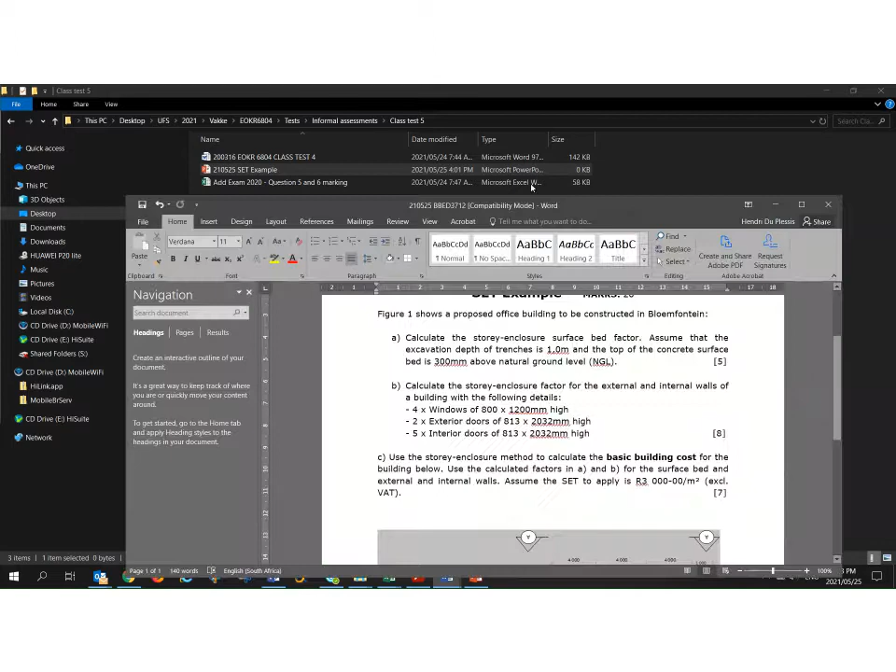Hi everyone. This is a recording just to show you an example of the storey-enclosure method and how it might be asked, or the things that you need to consider whenever applying the storey-enclosure method.

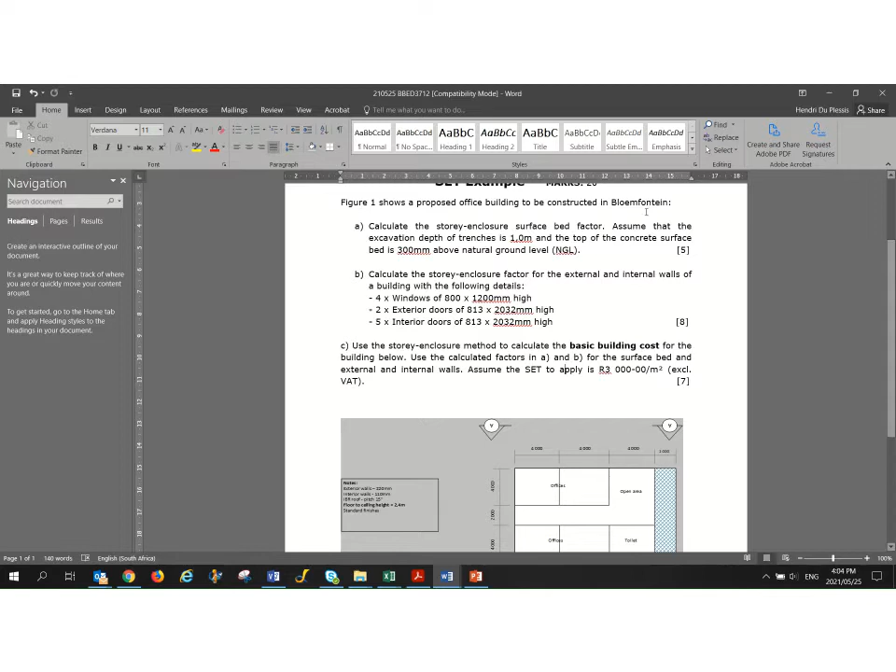So I've got a nice question here that I set up this afternoon. What you can see here is the example. I see there's a mistake here, I'll just correct that. So you've got a typical question with a drawing that is given, and then you have some different criteria surrounding it, and so on.

The question reads: Figure 1 shows a proposed office building to be constructed in Bloemfontein. The first question is calculate the storey-enclosure surface bed factor, and assume that the excavation depth is 1 meter and that the top of the concrete surface bed is 300 millimeters above the natural ground level.

If you look at example 5 of your study notes, you will see that it's similar to this, and it's a combination of all the preceding examples before this one.

That's question A. Question B is calculate the storey-enclosure factor for the external and internal walls of the building with the following details, and then you are given certain parameters.

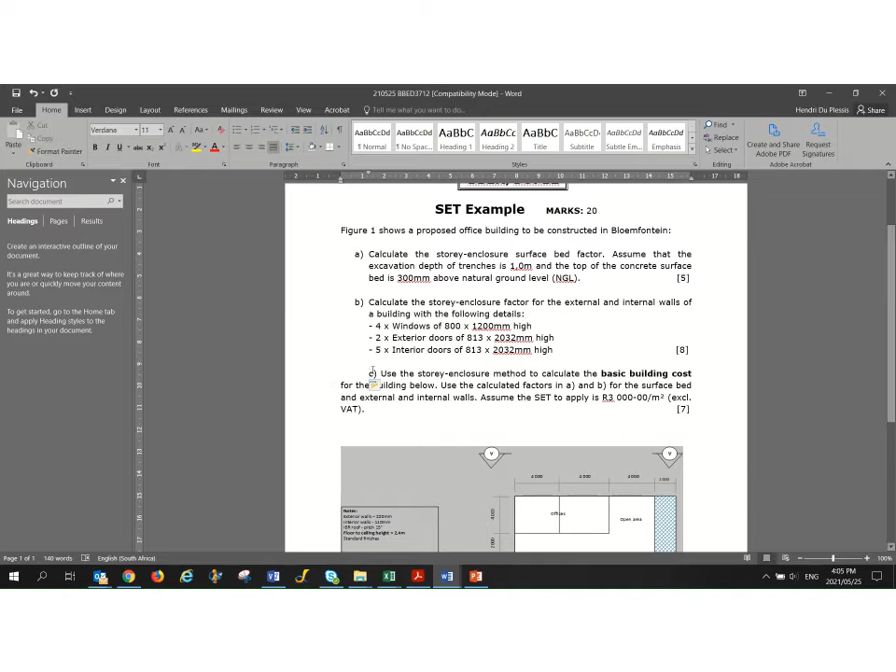So you can see there's 4 windows of 800 by 1200 millimeters high. You've got 2 exterior doors, and you've got 5 interior doors for this specific drawing. So that is question 2, or B.

Question C is use the storey-enclosure method to calculate the basic building cost for the building below. So use the calculated factors in A and B for the surface bed and external and internal walls, and assume the storey-enclosure tariff that should be applied to this question is 3,000 Rand per square meter.

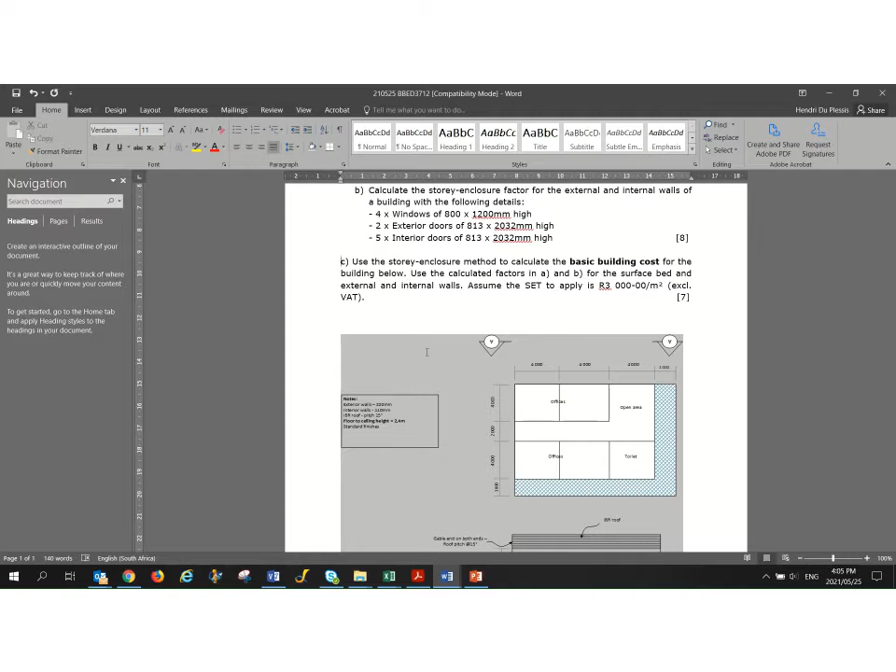So those are the parameters given and the example given. Looking at the drawing, the available information we've got is certain dimensions given: the exterior walls is 220 millimeters and the interior is 110 millimeters.

We've got an IBR roof with a pitch of 15 degrees, so that's very important to take note of. We've got floor to ceiling height of 2.4 meters, and then we've got standard finishes.

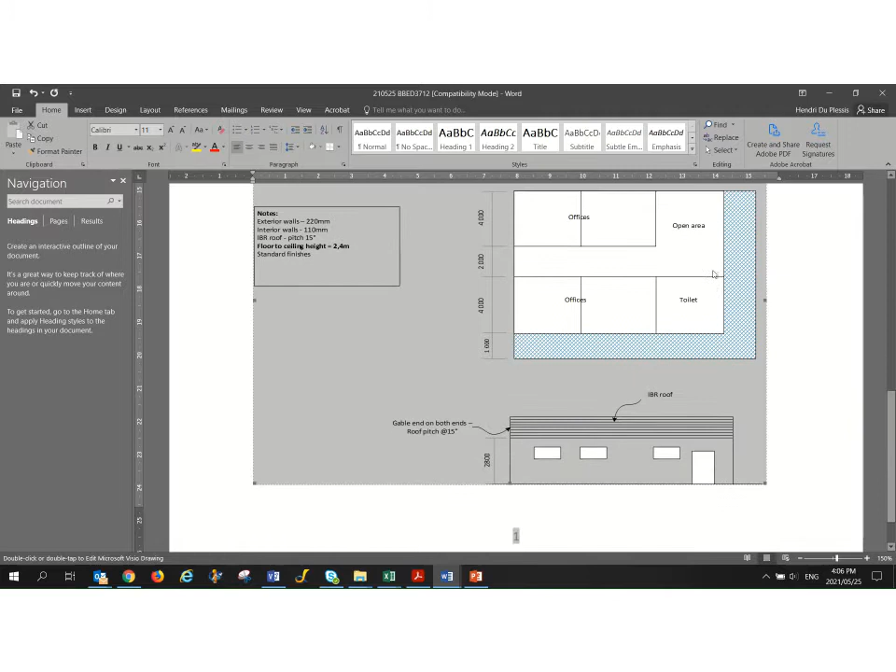And then we've got the external perimeter, and we can see the blue hatching is some paving also included in this drawing. We can see that the height from the top of your surface bed up to your roof plate is 2.8 meters.

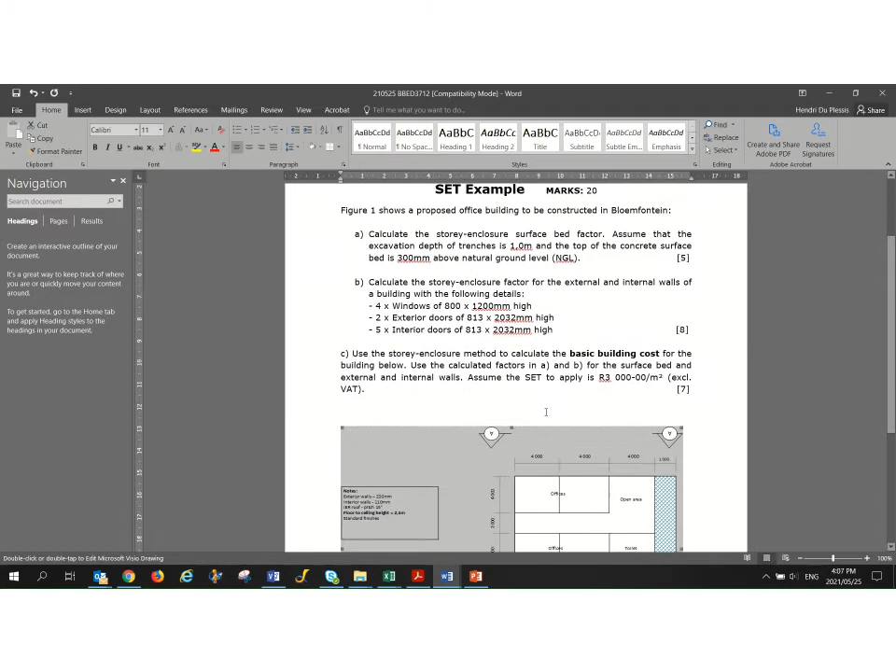So yeah, that's the basic information given. Let's have a look at question A and how to approach these questions. I've just copied this example into an Excel spreadsheet to make it available also.

So the first question is calculate the storey-enclosure surface bed factor, and assume that the excavation depth is 1 meter and the top of the concrete surface bed is 300 millimeters above the natural ground level.

Now, if you need to calculate your factor for your surface bed, the following formula has to apply. So we know this is the formula that we have to use, so this is one of the formulas that you have to know.

You need to know that D is the depth for the excavation in meters, and H is the height for the filling in meters, and then L is the length of interior and exterior foundation walls combined, so please take note.

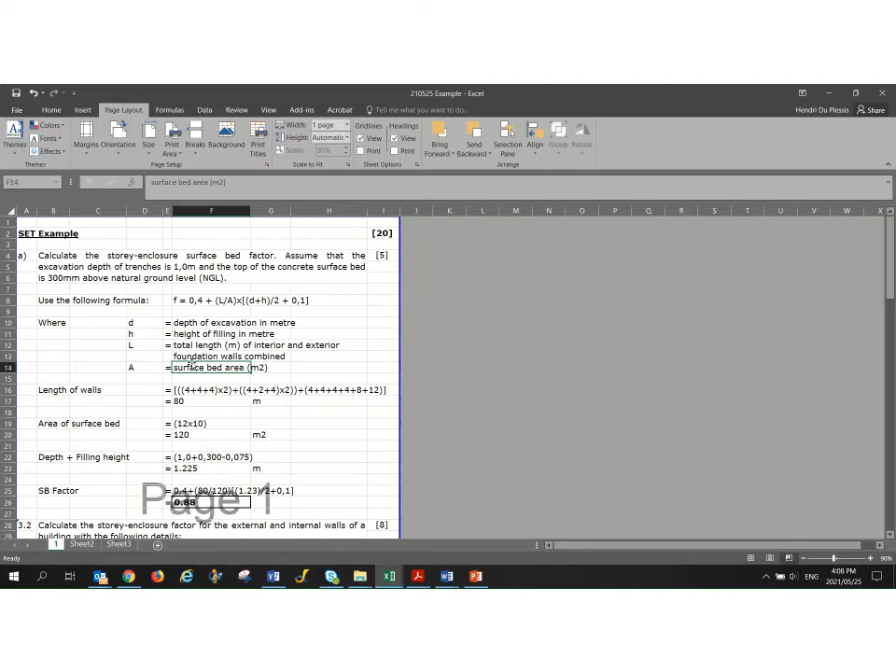And then you've got your area, which is your surface bed area that you will use. So then you basically just calculate or populate your formula.

So then you go through the basics of just measuring your work. I'm just going to put this on, and then you just calculate your perimeter walls, you measure that.

You go through your interior walls, you measure that systematically, and yeah, you just measure this systematically, and you get your length of your walls.

Sorry, I'm not going to do all of it because it's just going to be a bit time consuming if I do go through all of this, but basically you just go through the measurement of your lengths of your walls.

Later on you will use these lengths again when you're calculating your area of your external walls and the area of your internal walls. So yeah, just be aware of that.

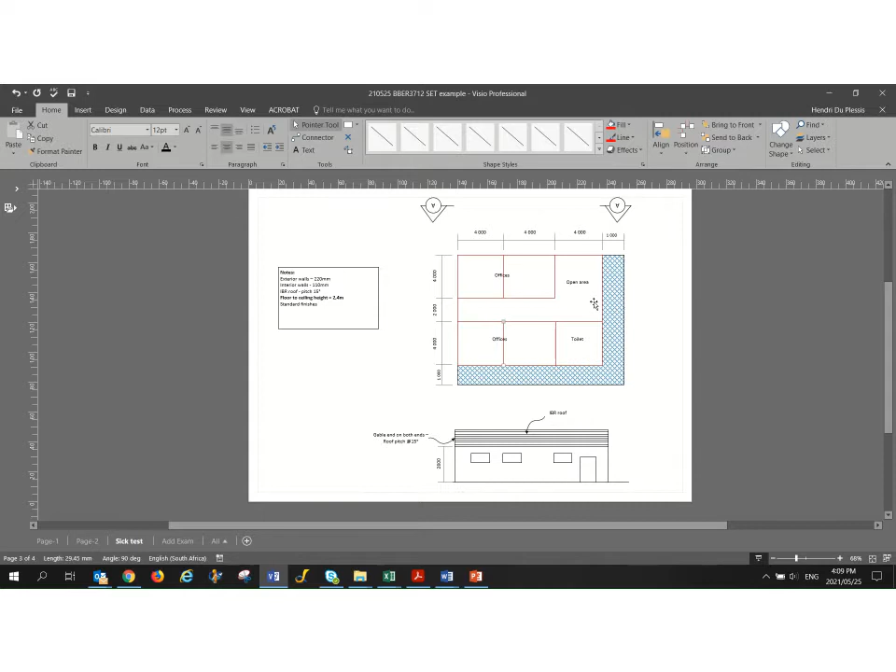So I'm just going to put this aside and then look again at our length. So the length of our wall, I calculated it as 80 meters, and then the area of our surface bed is basically 10 times 12, which gives us 120 square meters.

And then our depth of our filling and height, this is where you have your depth of your excavation plus your depth of your surface bed or your filling above your natural ground level. And then you need to remember to deduct your surface bed 0.075 as well.

So if you look at your examples, it clearly shows you how that is done. I think it's in example 4 of your study notes, so have a look at that, how this height is calculated. It's explained there in quite good detail, so just be mindful of that.

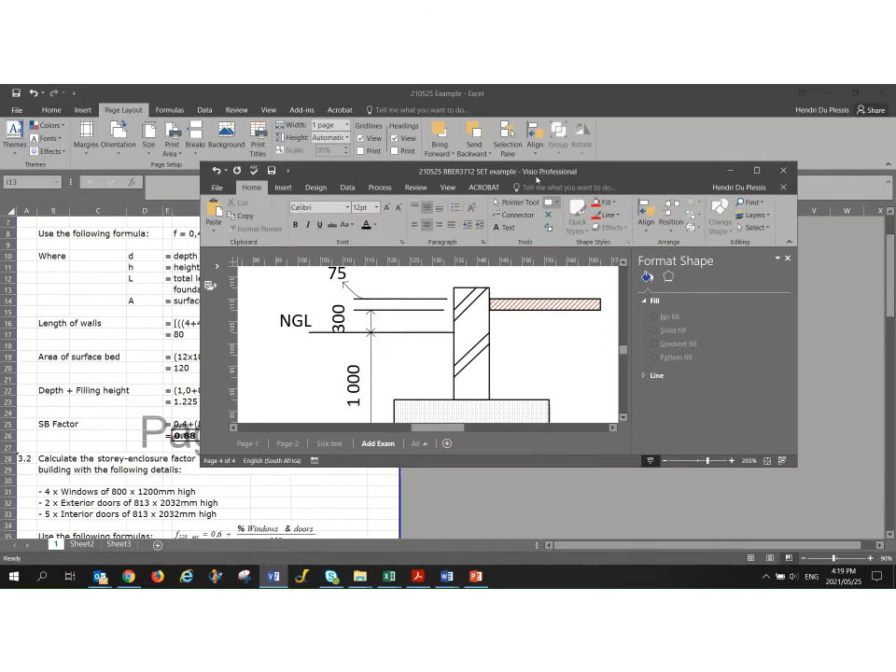Hi everyone, sorry I just took a small break there. I thought it would be best if I make a quick drawing of how that depth is calculated and how everything works into each other.

So here you can see your excavation depth is 1 meter, and then the 300 millimeters for your surface bed above natural ground. Sorry, that should actually be up to there, so it's the 300 mils up to the top of your surface bed.

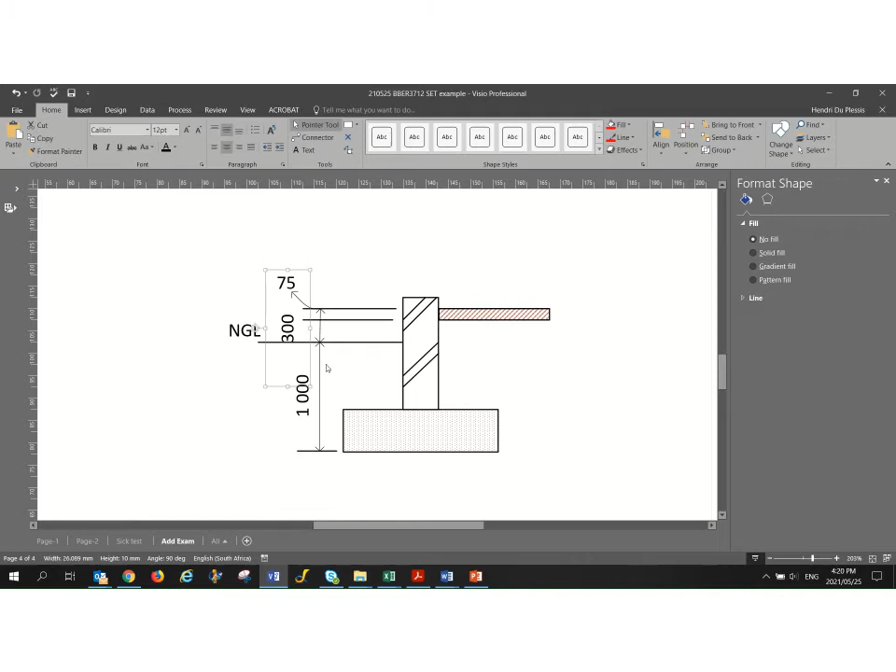So there's a little trick here. If the question states to the underside of your surface bed, then you don't have to subtract this 75 millimeters. But this is in short how that depth is basically calculated. You can familiarize yourself with the example in your study notes as well, but this is more or less how it works.

Okay, so getting back to the example, we now calculated our depth, which is our filling height. So it's 1.225, which you can round to 1.23.

Then what you do is calculate your factor by populating your formula. So it's 0.4, and then your length of walls divided by your surface bed area, times 1.23 divided by 2, plus 0.01, and then you add the 0.4 at the end. This is basically the formula, and you get a factor of 0.88. So that's the first question answered.

Have a look at that. The second question is to calculate the storey-enclosure factor for the external and internal walls of the building with the following details. So now we know it's the internal and external walls, so two formulas will apply.

So we've got our first formula, which is in your book that you have to know, and our second formula for the 110 millimeter wall. You've got your percentage of windows and doors that you have to calculate, and your borrowed lights as well.

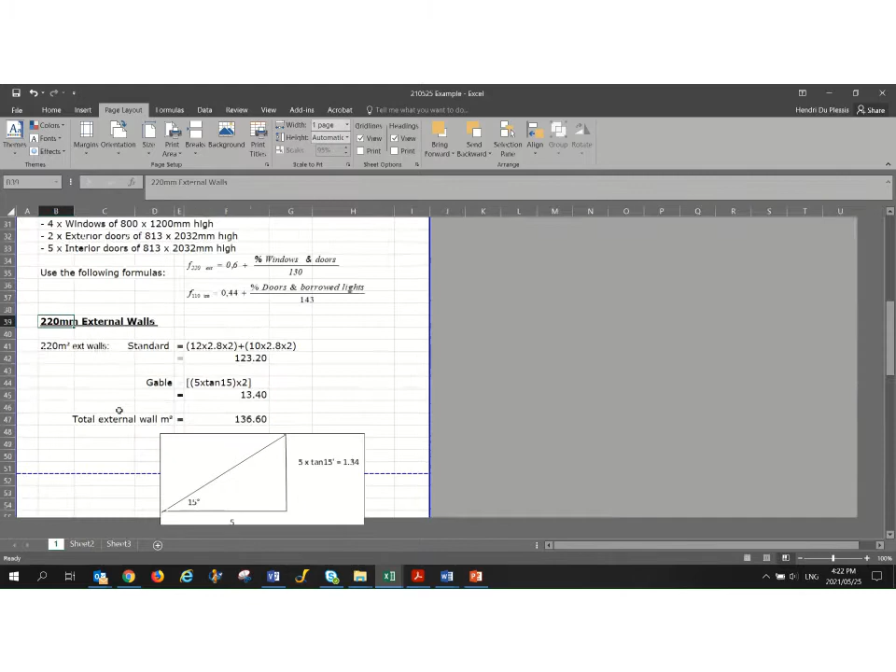Okay, so let's first look at our 220 millimeter wall. You can see here that we've put in the standard for the square meter area for our external walls. So that is now, if we go back to our drawing, let me just put this one on.

Okay, if you have a look at this, let me just convert that back to black, or let's make it purple. So it's the purple lines for this section here. You should remember it's the walls over your doors and windows, up to your wall plate level, and then you have to add your gable wall into that as well. So just take note of that whenever you're calculating.

So I've divided that into our standard one, which is our walls up to wall plate, and then I added the gable walls later on. You can combine the two, but it's usually better to calculate them separately, so that if you make a mistake on one, whoever is assessing the question can actually see what you've done.

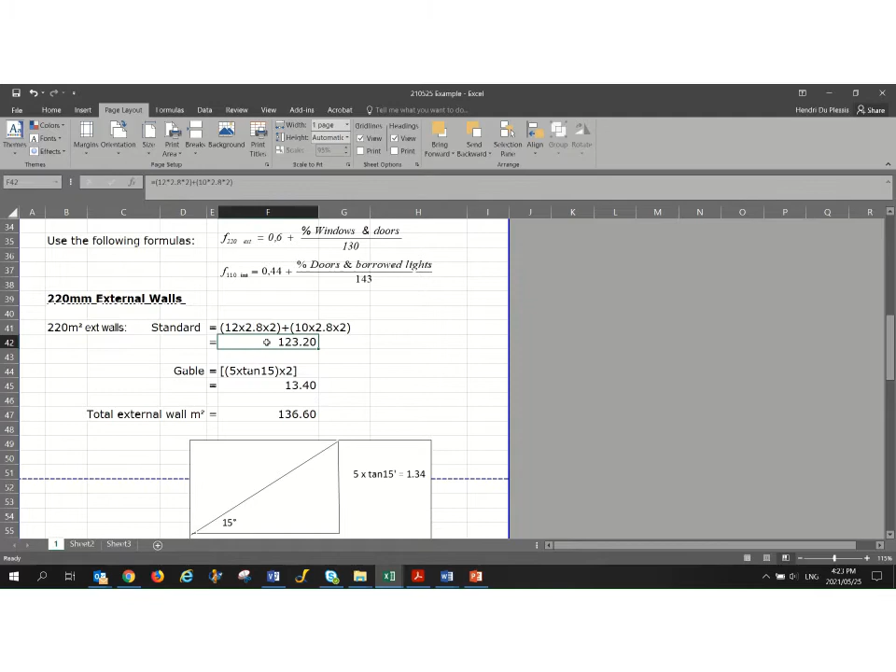Okay, I think the standard walls is quite simple. It's the perimeter times the height, which in this case is 2.8 meters. So if we go to our drawing, you will see it's the 2.8 meters here to your surface bed height. So that one should be fairly simple.

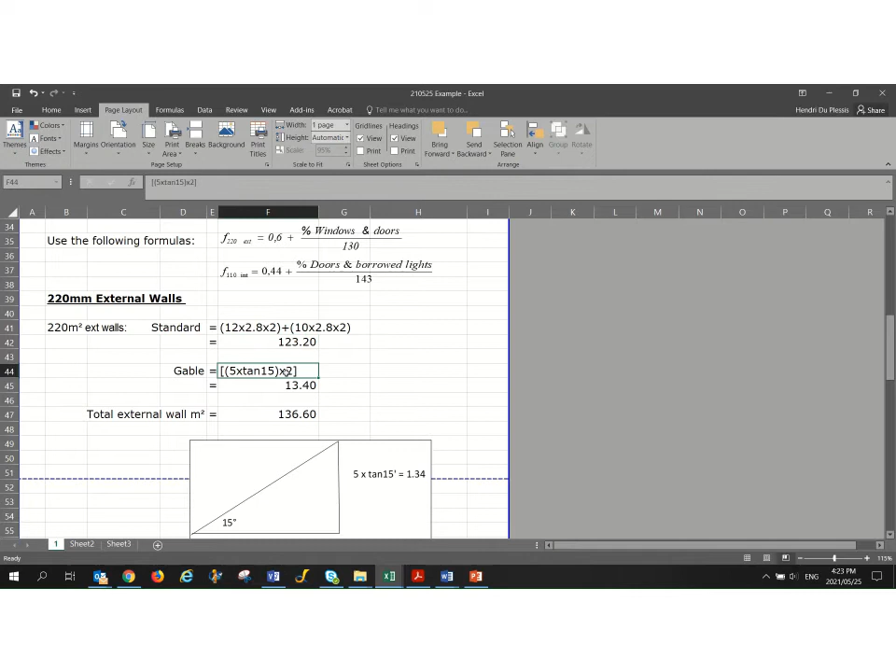And then the gable wall ends, this is where you need to use your trigonometry formulas. So what I've done is, we know that our length on this side wall where the gable wall end is, is 10 meters. We want to have a 90-degree angle that we can actually use, so we divide that section into 2 to get our 90 degrees, which is then 5 meters.

So it's the 5 meters times tan 15. Just make sure you know how to use your calculator, whether the 15 comes before the tan or behind the tan. These days most scientific calculators have the tan afterwards, so it's quite easy to use that. Then you just calculate what the height is here.

So now you've got your height and your breadth. You can calculate your area by timesing these two with each other. Also note that if you times it by 2, you will actually have the entire gable wall section on this side. So I just times that by 2.

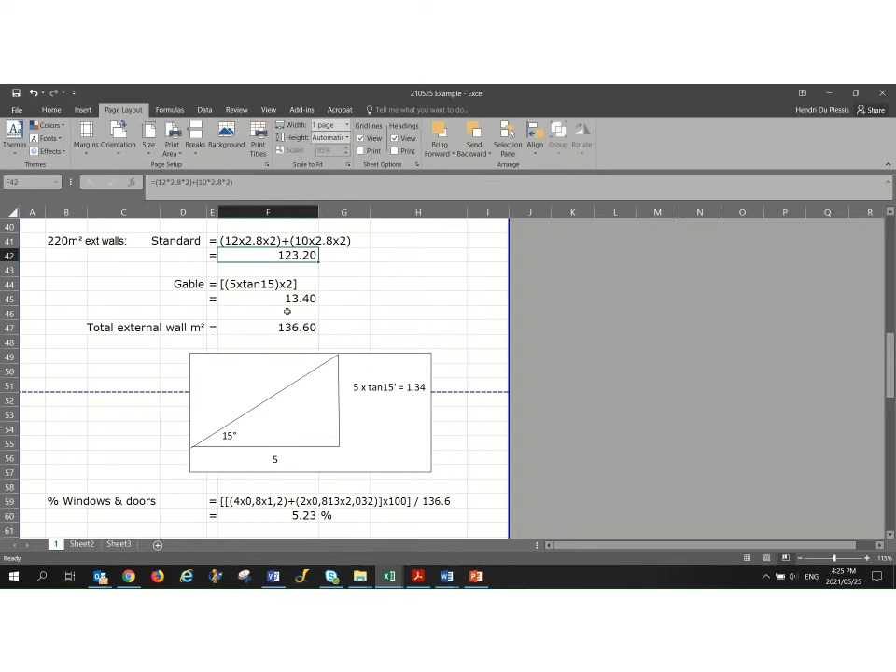So it's 5 times 1.34 times 2 to get our gable wall end areas, and we just add those two together to get our total wall area. Then you just populate your formula.

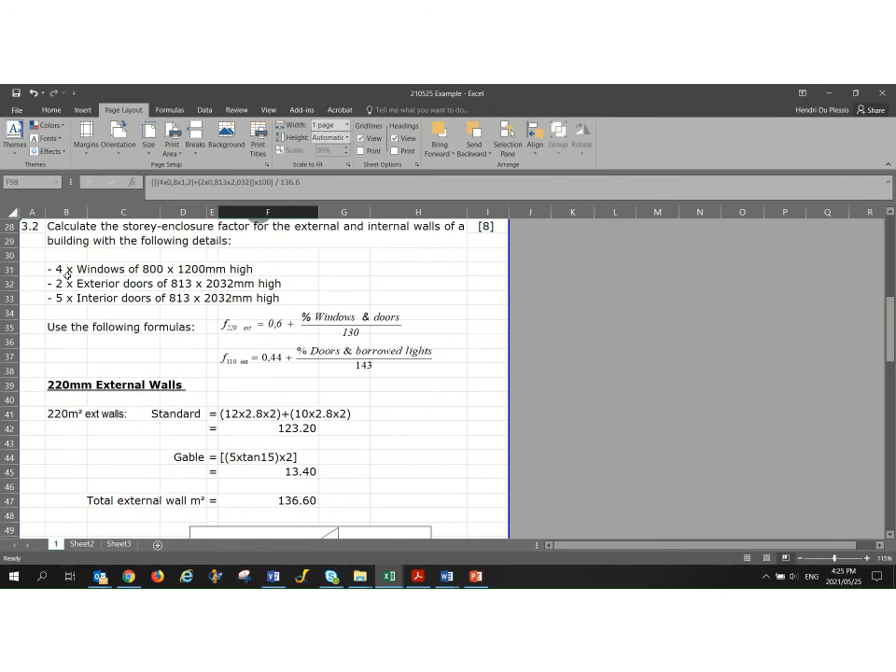In the question it was stated that we've got 4 windows and 2 exterior doors. So you get that perimeter, or the area of the windows and doors, times 100 to get it to a percentage, and then you divide it with your total wall area, which is 136.6, to get to a percentage. Okay, so that's the first step that you need to do.

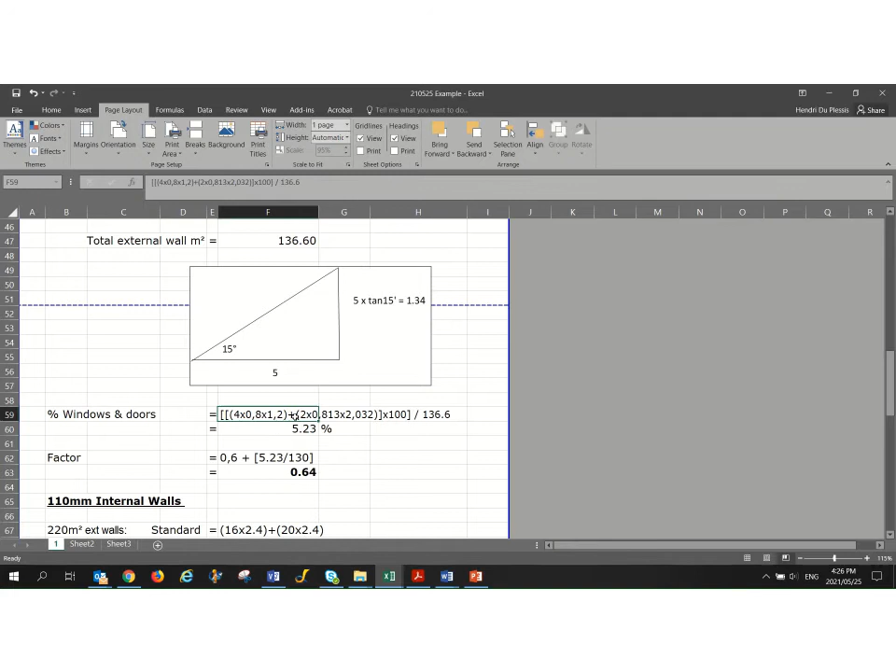Now you can populate your formula, which is 0.6 plus your percentage divided by 130 according to the formula that's given - well, not given in the question paper, you need to know the formula - and you get a factor of 0.64. So you can see our external walls actually have a much lower contribution to the total, a lower factor than a normal factor of 1.

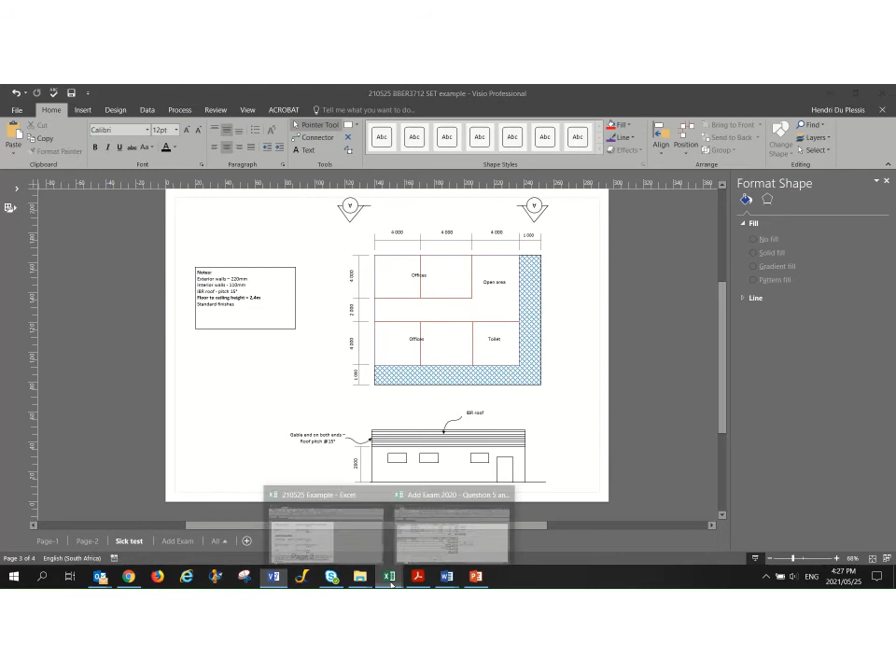And then we just do the same with our internal walls, a bit quicker. If we go here, which is the ones in red, you just get that length, and we know that it's built up to ceiling height, which is 2.4. So we just calculate our ceiling height. I used the north to south walls first times 2.4, and then I just added the west to east walls, and added them together and timesed it with the height to get to 86.4.

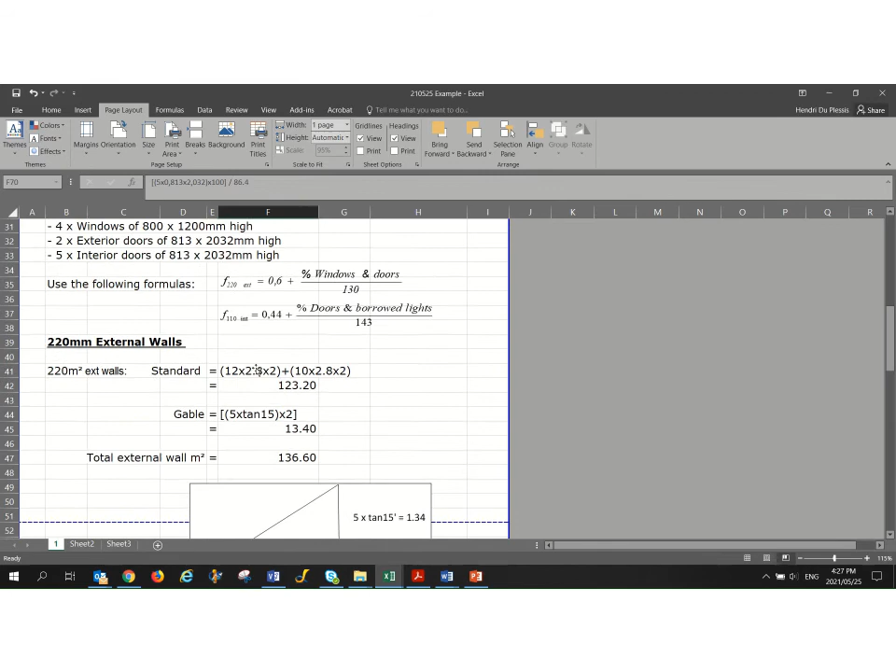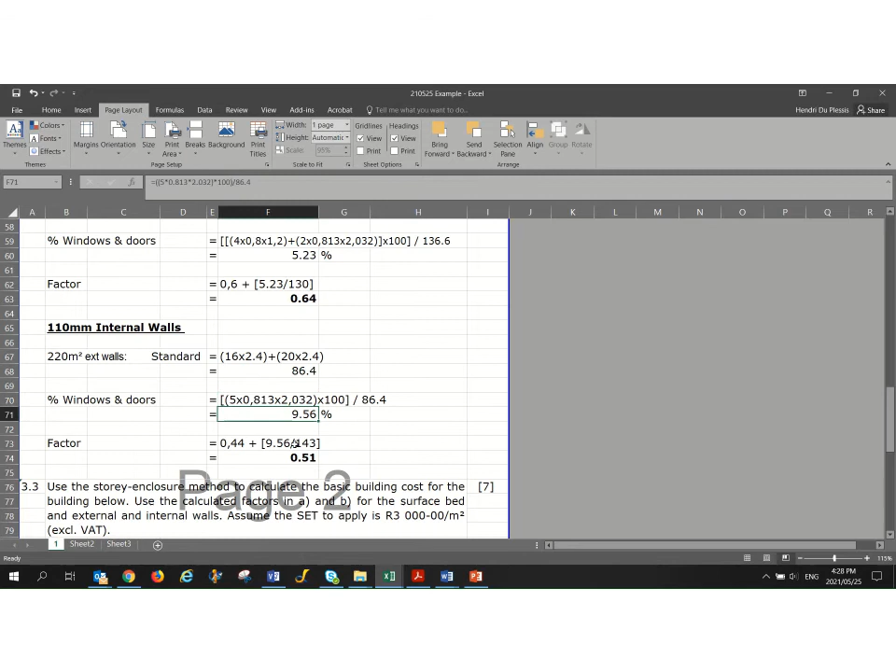And then the percentage again is the information given here at the top. So we've got 5 interior doors, 5 interior walls here, the perimeter times 100 divided by the area of our internal walls, which gives us a percentage of 9.56. And then that is put into our formula, which is 0.44 plus 9.56 divided by 143, which gives us a factor of 0.51. So this one, the interior doors, is still fairly close to 0.5.

Okay, so those are the two factors for our internal and external walls. And then we get to our third question, which is to use the storey-enclosure method to calculate the basic building cost for the building below. Use the calculated factors in A and B for the surface bed and external and internal walls. Assume the storey-enclosure tariff to apply is 3,000 Rand per square meter.

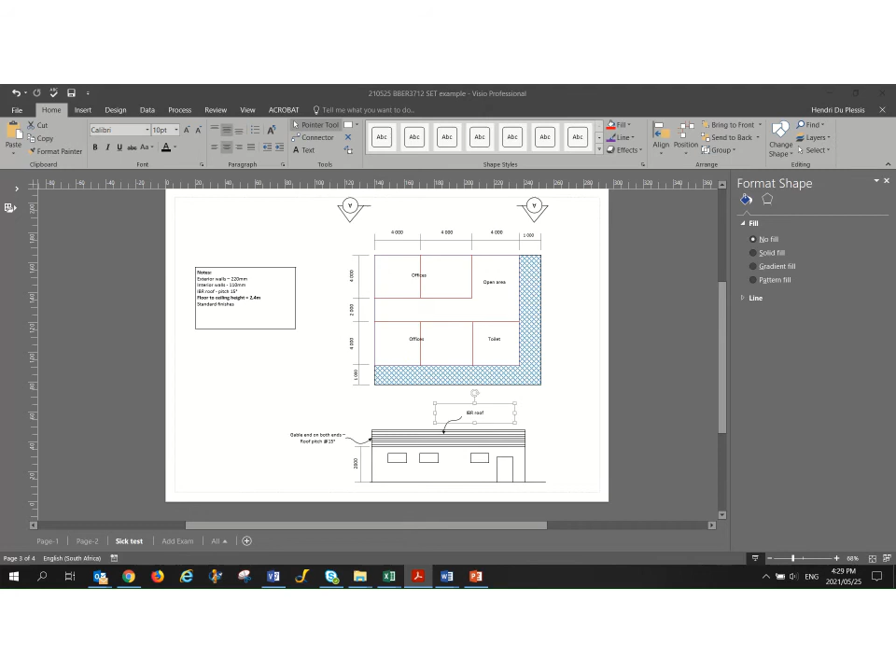Okay, and this is excluding VAT. So then you just go ahead and calculate what your surface bed area is, your roof area. We've already calculated our wall area, our internal wall area, and then we just apply our factors. Just remember, with our roofs, we've seen that it's an IBR roof according to the drawing, so we know it's a standard roof. So if you go to your study notes, the standard factors that you will use for your roofs is contained on page 12.

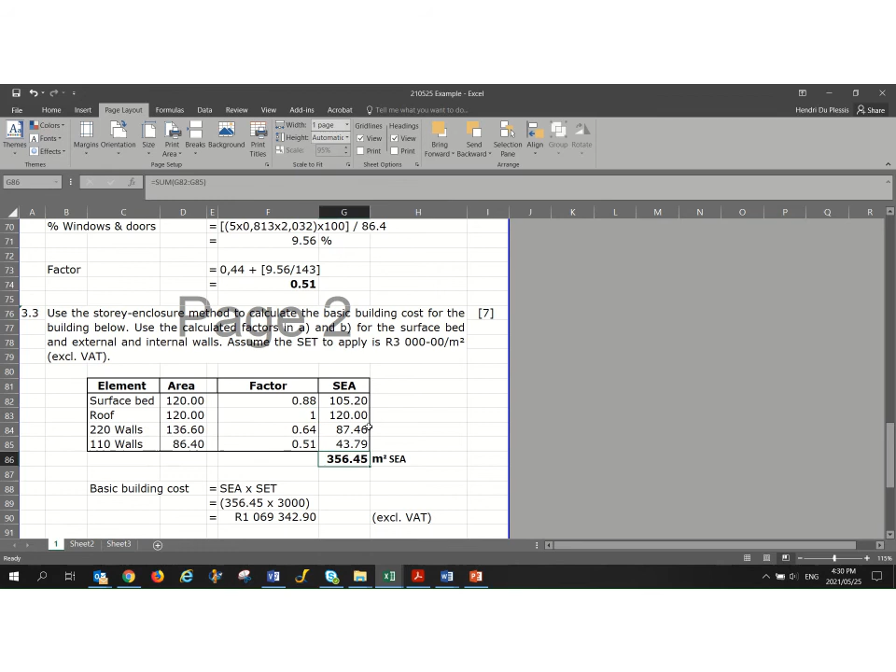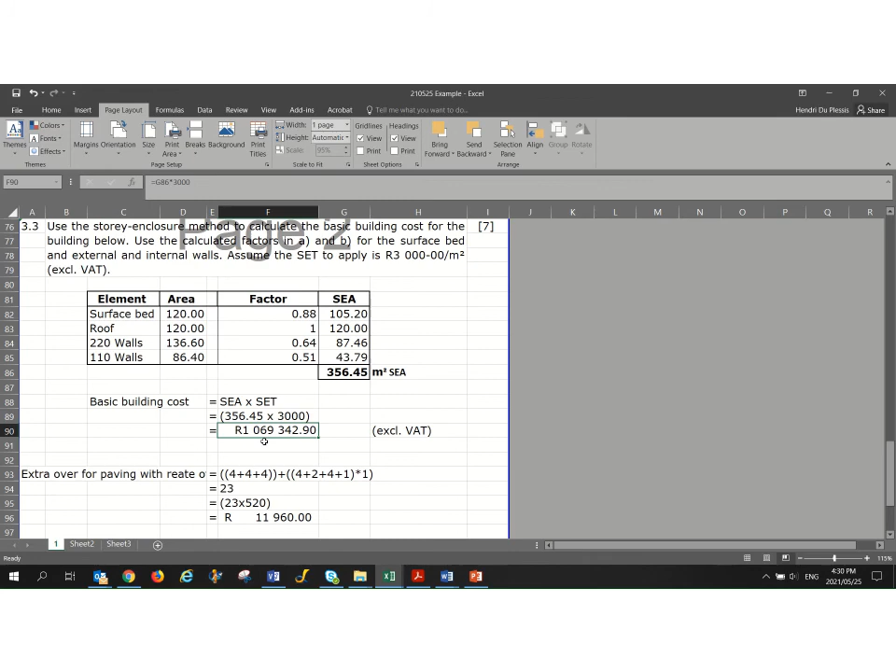You will see cement tiles is 1.25, and our corrugated iron or asbestos roofs are 1, so I used the corrugated one for the IBR roof, and subsequently did the calculation. So the factors were put in, the ones that we calculated already, plus the one for the roof. Okay, and then we calculated our story enclosure area. And then it's a simple thing of just timesing our story enclosure area with our tariff to get to our basic building cost.

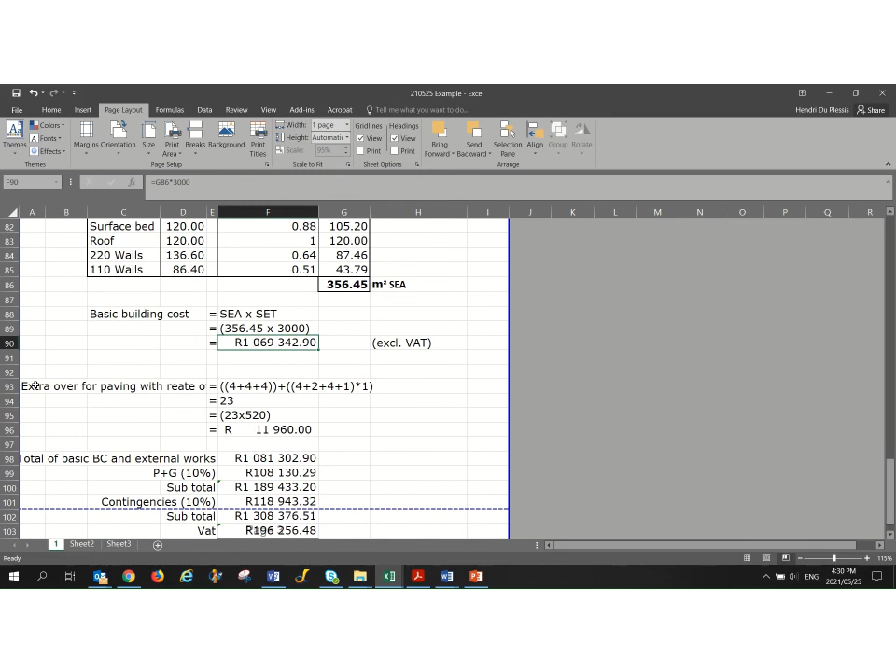Okay, so this is everything up to our basic building cost, so you can have a look at that. And then just as an extra note, this section in red is something that might be asked additionally. So now we've calculated the basic building cost, but now we want to calculate what the actual cost of the building would be. So you would see that on the drawing there's some paving here on the side that was added.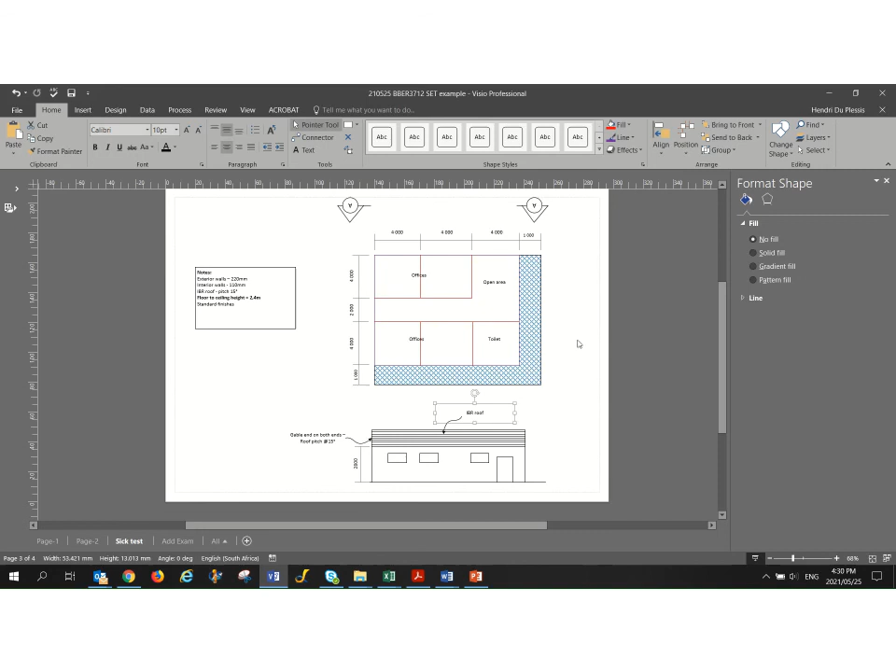So if we take it at a rate of 520 Rand per square meter, we just calculate what the external value would be, or the paving contribution, and we get the area and timesed it with the 520 to get an additional 11,960 to be added to our basic building cost here.

And then it's a simple thing of just adding our P's and G's, getting a subtotal first, very important. I see very many students actually trying to add this without the subtotals. You have to add the subtotals, otherwise you can't calculate your contingencies, and then you can't calculate your VAT if you don't have a subtotal for that also.

So our estimated cost for the building, not our estimated basic cost, our estimated cost for the building is now 1.54 million, which is including VAT, contingencies, and P's and G's. So just take note, this might be an extra little section in the questions that might be asked.

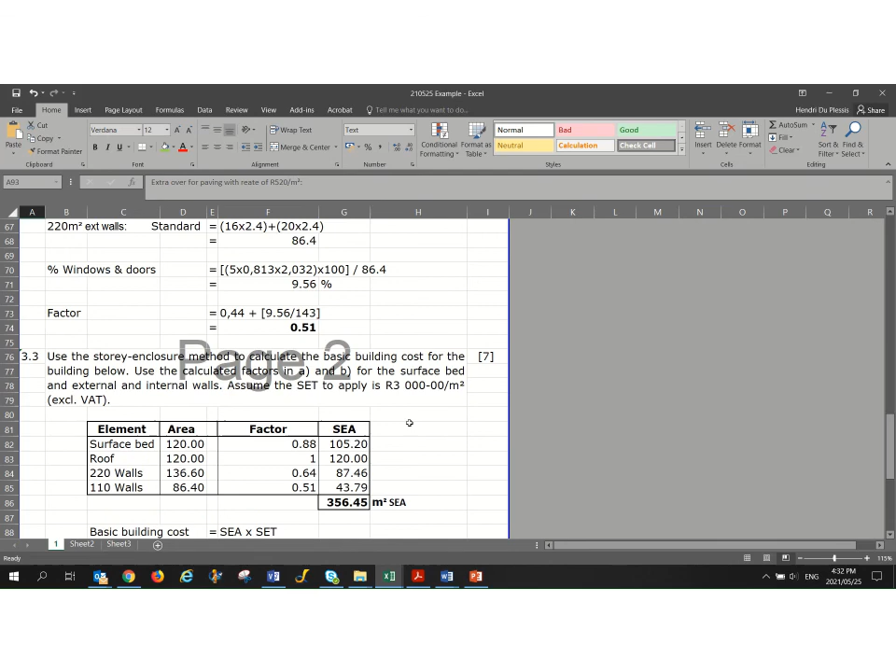So yes, in short, that is how a typical example of the storey-enclosure method works. Very similar to example 5 of your study notes. And yeah, so work through this one. I think it should be a nice one to practice. Thanks everyone.